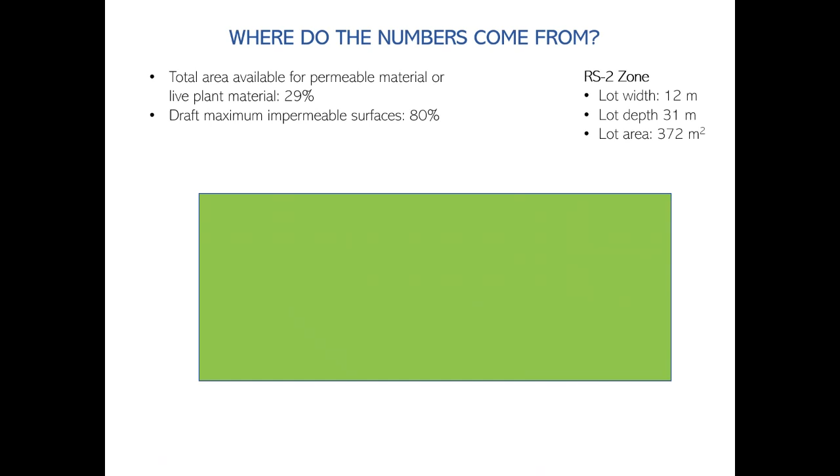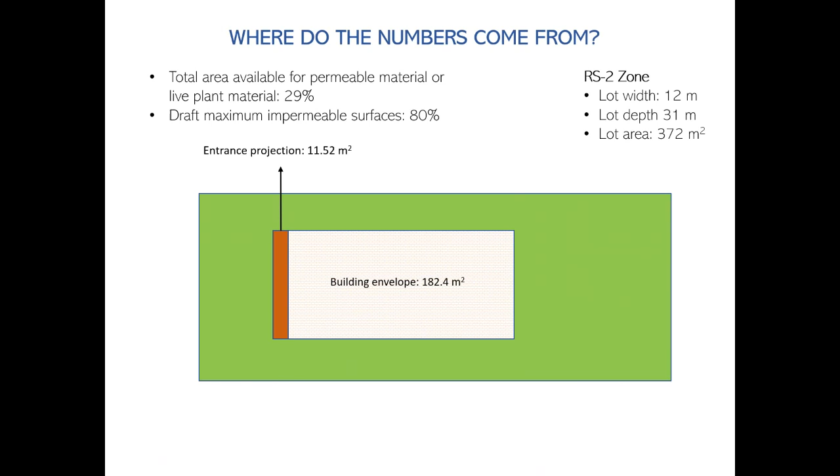This is another example showing a property in the RS2 zone with a lot area of 372 square meters. If you were to build out to maximize the setbacks in this zone, you would get a home of roughly 182.4 square meters. Then you could have a projection like an overhang at the front of the home. You could have a deck projecting from the rear of the home. You would definitely have a driveway and a front walkway, and an accessory building like a shed in the backyard.

Again, we have seen in the past that homes will cover a large proportion of their property with surfaces like concrete, leaving little space for the natural filtration of water into the ground. In this case, for the RS2 zone, there's roughly 29% of the property which could be open for landscaped areas. And this aligns with the draft standard, which would allow a maximum 80% of the property to be covered with impermeable surfaces, with the remaining 20% which must be permeable.

So as you can see with both of these examples, there's still some leeway to integrate other impermeable elements on the property that we may not have taken account for, so that the standards could be reasonably attained in new housing developments.

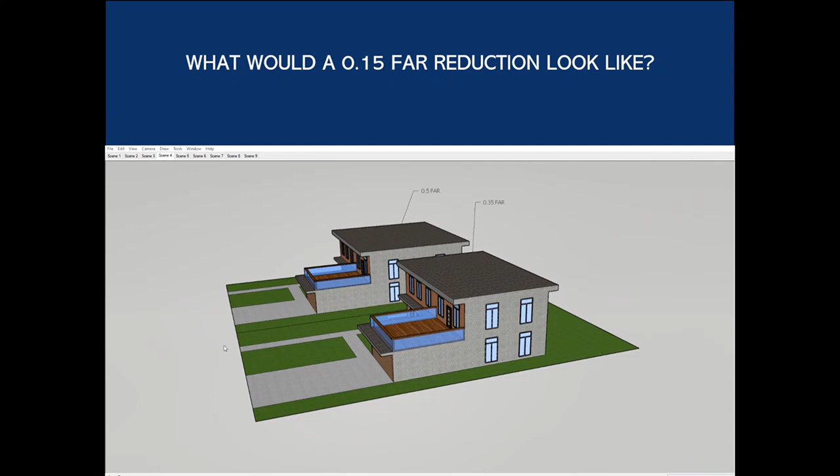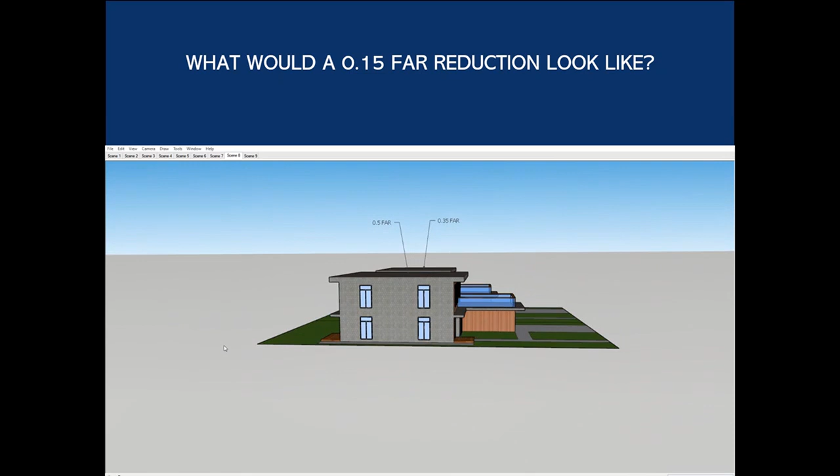As you can see, the proposed FAR reduction model represents a smaller building that looks more modest in scale compared to the existing FAR standards model. This scenario illustrates a reduced building depth, which may be more visually appealing for residents in neighboring properties. However, a reduced building width could also be incorporated with the same proposed FAR reduction, resulting in a slimmer building visible from the street. Now I will pass it along to Emma, who will continue with the next slide.

Something to consider if we were to reduce floor area in residential zones is the impact on the rental housing market. If floor area is reduced, homeowners may decide not to construct a secondary suite or a coach house due to reductions in living space.

A way to combat this is through density bonuses, an approach used in West Vancouver as well. For example, a 0.05 FAR bonus for up to 500 square feet could be provided for the construction of a registered secondary suite. Similarly, a 0.1 FAR bonus up to 800 square feet could be provided for homeowners who wish to construct a coach house.

Another potential approach that could be implemented to reduce the scale of homes in mature neighborhoods is the inclusion of portions of garages in floor area. Currently, the zoning bylaw excludes all of the garage from the calculation of floor area, even though the garage does add massing to the home. Including portions of the garage in FAR is an approach taken by other municipalities in Metro Vancouver, like New Westminster.

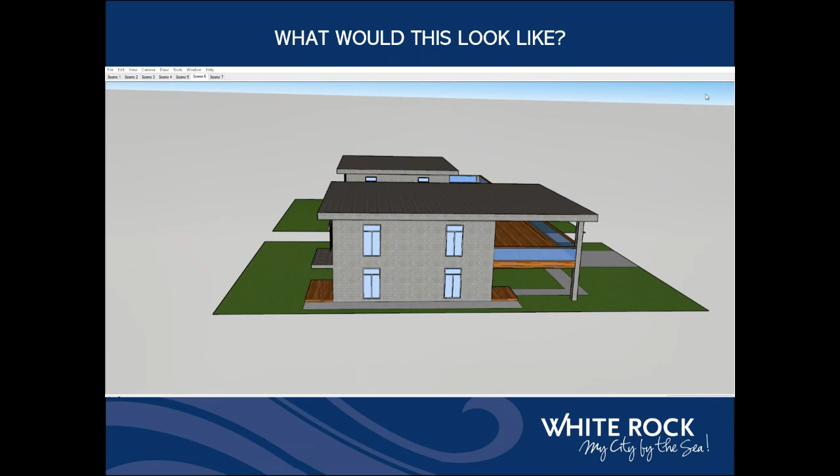In this alternative approach, the proposed changes would include any portion of a balcony which exceeds 10% of the residential gross floor area of the home in the total permissible square footage allowed on a lot. As you can see in the video, the covered balcony model adds quite a bit of massing to the building, which is why we thought this alternative approach would be a great way of addressing the scale of homes in single-family zones. Now I will pass it back to Emma, who will continue with the next slide.

Did you know that some cities in Metro Vancouver provide bonuses for FAR for energy step code compliance, similar to FAR bonuses for secondary suites and coach houses? Providing a bonus for the implementation of the various levels of the BC Energy Step Code would help to incentivize green building methods.

This would be particularly impactful for residential homes, as green building standards such as the Energy Step Code require thicker insulation, which further takes away from livable space in the home. By providing this small bonus for FAR, people are able to construct green homes without reductions to their living area.

So for example, in New Westminster, residents can get a 0.01 FAR bonus if the building meets Energy Step Code 3, a 0.03 FAR bonus if the building meets Energy Step Code 4, and a 0.05 FAR bonus if the building meets Energy Step Code 5 or Passive House Design.

The benefits to encouraging green building standards include improvements to energy efficiency and reduction in monthly costs, and a reduction in greenhouse gas emissions, which mitigates the impacts of climate change.

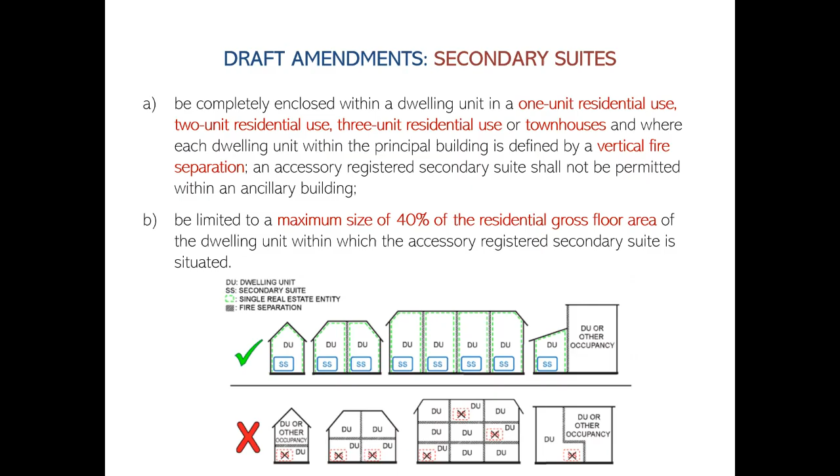So as I mentioned, the second key issue identified was around amenity space requirements. Currently, the zoning bylaw has no standards which require amenity spaces in multi-unit residential buildings like apartments and townhouses. Amenity spaces are recreational areas provided in multi-unit residential buildings like apartments and townhouses. These areas can either be indoors or outdoors, open to all residents of a building, or restricted to a specific unit for residents to use.

Amenities like communal swimming pools, meeting rooms, and dining rooms, which are indoors and outdoors and available to residents, are called common indoor amenity spaces. Outdoor common amenity spaces could include community gardens or recreational spaces like a swimming pool, which are open to anyone in the building and situated outside. Lastly, outdoor private amenity space could include landscaped areas, patios, or decks, which are reserved for the use of someone in a specific residential unit.

One of the key reasons staff incorporated these draft amendments is due to the onset of the COVID-19 pandemic again, and because of the value people place on access to nearby amenities. These draft amendments seek to improve the livability of new apartment developments by incorporating outdoor common and indoor common amenity areas to encourage social connection and a sense of community. Similarly, in townhouse developments, outdoor common amenities and private outdoor amenity areas ensure residents have private outdoor areas for children and families to use. Another key amendment proposed is the exclusion of indoor common amenity spaces from the calculation of gross floor area in secure rental tenure developments.

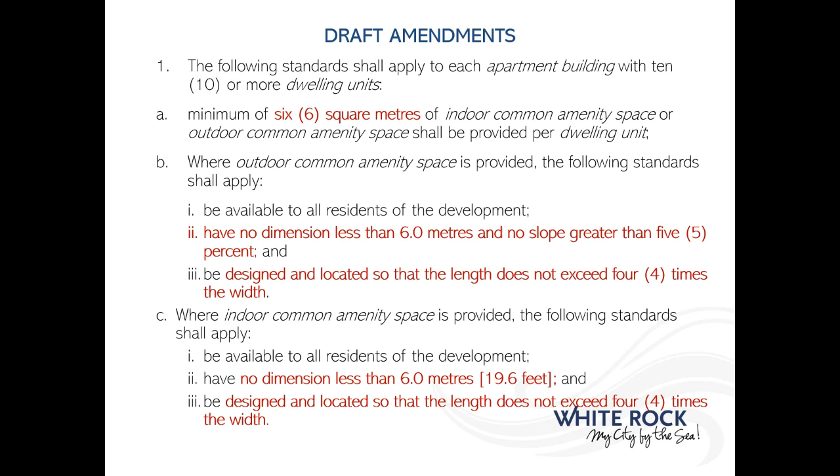So the draft amendments for this section would apply to apartment buildings with 10 or more dwelling units at a supply rate of 6 square meters per dwelling unit. As per points 1B and C on the slide, if outdoor common or indoor common amenity areas are provided, they must be available to all residents, have no dimension less than 6 meters, and be designed so that the length does not exceed 4 times the width. These design standards would ensure that the amenity space is functional and can reasonably accommodate recreational activities.

I'll now pass it on to Emma, who's going to discuss our next topic, which is landscaped open space.

Thanks, Neetu. Draft standards for landscaped open space can encourage many community benefits, such as the natural filtration of water through the ground, which reduces surface water pollution. This would be accomplished by requiring landscaping with permeable materials like live plant material. Other key reasons include tree retention, beautifying the streetscape, and encouraging the use of live plant material for the provision of wildlife.

We have a question I thought you could speak to. It asks, will the bylaw limits we're looking at right now as they relate to landscaped open space prescribe or set a total percentage or maximum percentage of impermeable surface? Yes, draft standards would have a maximum percentage of the lot which could be covered by impermeable materials. For example, in the RS1 zone, which we'll get into in a few slides, the maximum amount of impermeable materials would be, say, 70%, and the rest of the lot, 30%, would have to be permeable materials. That's something we're looking to integrate into all the different zones in White Rock.

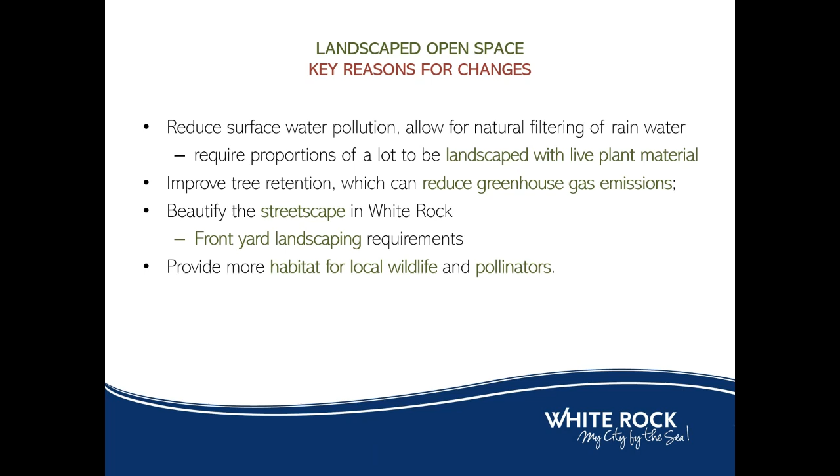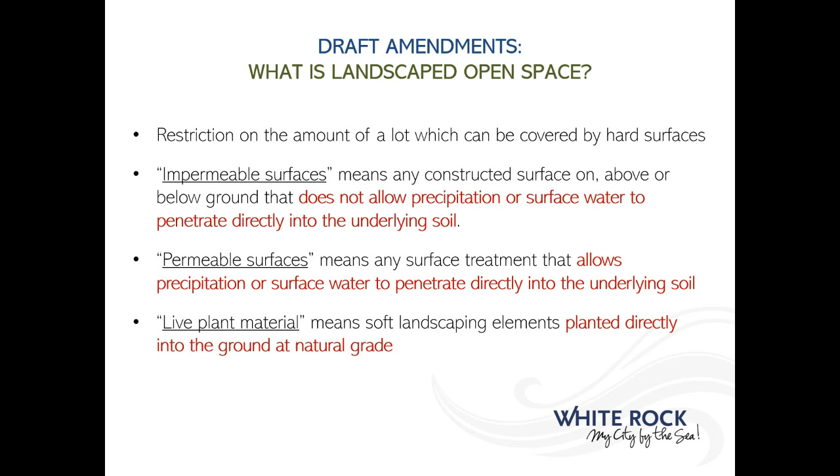So landscaped open space standards typically place a restriction on the amount of a lot which can be covered by hard surfaces like grouted stone or concrete. Impermeable means water cannot penetrate into the underlying soil, while permeable means that constructed surfaces and live plant material allow water to penetrate directly into the ground.

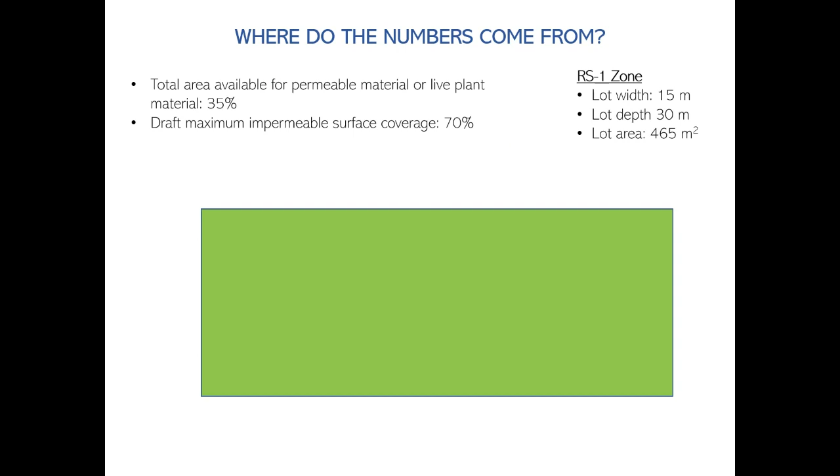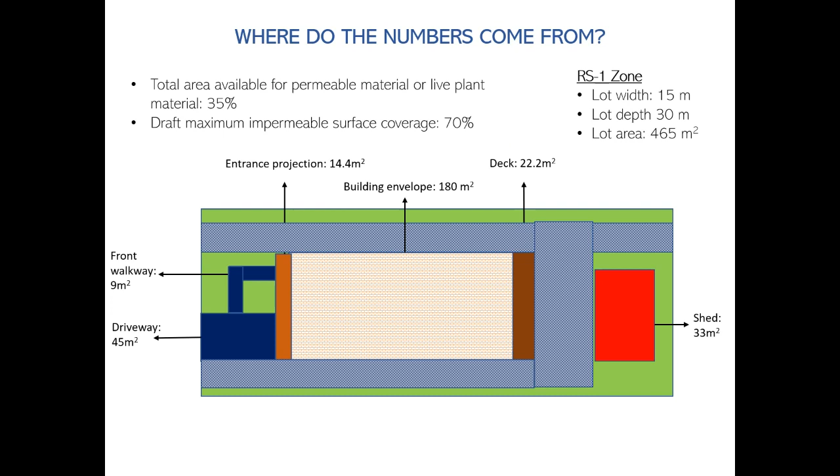We did scenario testing to ensure that people would be reasonably capable of attaining landscaped open space standards. We drew out all the impermeable surfaces on a lot to see how much space could be reasonably dedicated to open permeable surfaces. In this case, for the RS1 zone, there's roughly 35% of the property which could be open for landscape areas, and this aligns with the draft standard requiring a minimum of 30% of the lot covered with permeable material.

Similar to the previous slide, this shows a lot in the RS2 zone. Considering all the hard surfaces that could be integrated onto this lot, like a building, a shed, or your driveway, you would have roughly 29% of the lot open for landscape materials, which aligns with the draft standard requiring a minimum 20% of permeable surfaces. As you can see with both examples, there's still some leeway to integrate other impermeable elements on the property that we may not be accounting for, so the standards can be reasonably attained for new housing developments.

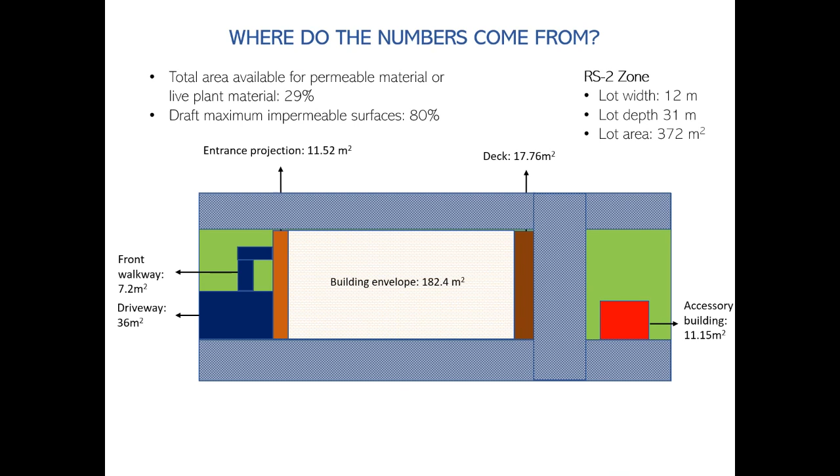This is an example of a model showing the impacts of the landscaped open space standards. Here we have an RS1 zone lot. In the video, the model represents proposed landscaping standards on the left, and the model on the right represents no landscaping standards, or the status quo.

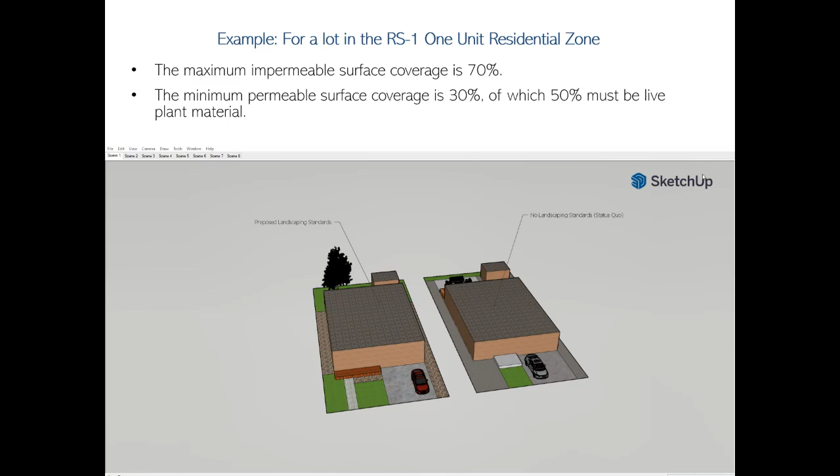Some key things to note are that the side yard area and the front walkway have incorporated river rock, which is an example of a permeable material for the proposed landscaping standard model. The no landscaping standards model has pavement in the side yard area and the front walkway, and a large grouted stone patio in the backyard. These are all non-permeable elements. A property owner could potentially pave over their entire lot with concrete or asphalt. With the new proposed standards, this would not be permitted on an RS1 zoned lot, and you would need a minimum 30% of the lot landscaped with permeable materials.

Now I'm going to discuss our next topic, which is the scale of housing in single-family home zones. Staff focused on this topic as part of Council's strategic priority to review single-family home areas.

Some of the key reasons as to why these reductions in the scale of residential housing are being explored include concerns over what residents call the monster home dilemma, whereby newer housing development does not suit community character, and this can be addressed by reducing floor area ratio, otherwise known as FAR. We will also be discussing density bonuses, which can be provided for energy efficient building design and for accessory dwelling units like secondary suites and coach houses to support the rental housing market.

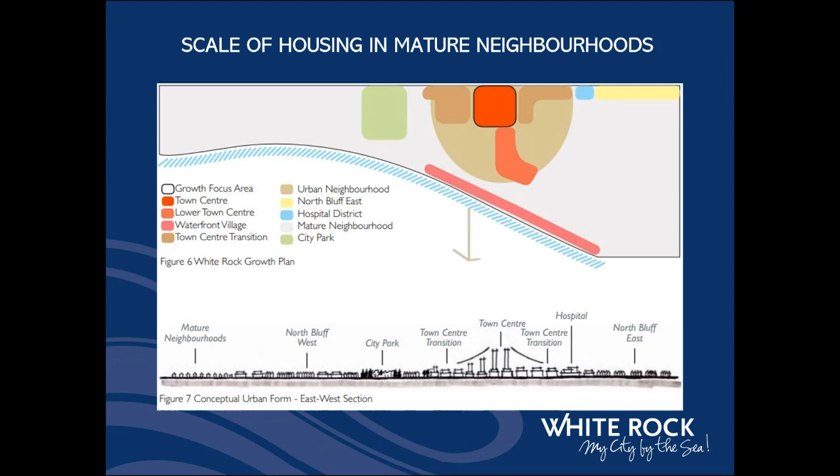The majority of areas in White Rock are known as mature neighborhood in the official community plan. These areas are characterized by low-scale residential development like single-family home zones, duplexes, and triplexes. When discussing draft amendments for single-family home zones, these are the areas we're referring to - the mature neighborhood area, marked as gray on the upper portion of the map.

Engagement sessions for the development of the 2017 official community plan indicated that many in the community felt that the character of new housing development doesn't suit existing development in the city of White Rock. One resident noted that we need to define the character of housing to be built, that there are too many monster homes. Another mentioned the loss of neighborhood character from monster houses, and that monster homes don't fit neighborhood character. This is a trend that we saw in engagement summary reports for the 2017 OCP engagement sessions.

An approach to reduce the scale of single-family homes is through reductions to FAR. FAR, or floor area ratio, is the ratio of a building's total floor area relative to the size of a lot. For example, if you have a 500 square meter lot and the FAR is 0.5, then you could build a 250 square meter home. Certain areas in the home, though, are not included in the calculation of FAR, such as basements, garages, carports, crawl spaces. So you could accommodate a home that is actually much larger than 250 square meters on a property of this size, if you accounted for all the space not included in the calculation of FAR.

The first alternative approach to addressing FAR is the scaled approach, used in West Vancouver for all of their single-family home zones. In this approach, if your lot is greater than 677 square meters, then the FAR could be 0.35. If the lot is mid-sized and between 474 and 677 square meters, then the total size of the home is set at 237 square meters or 2,551 square feet. And if the lot is smaller, less than 474 square meters, the FAR would remain at 0.5.

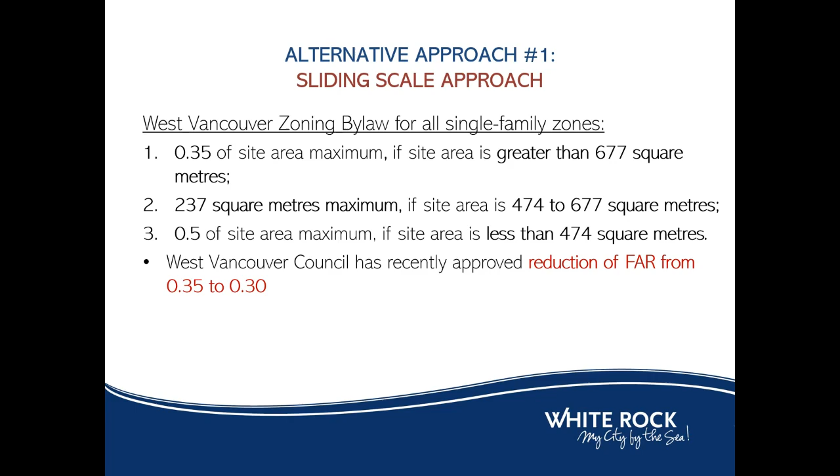This draft standard would be most impactful in the RS1 zone, which currently has an FAR of 0.5. The majority of lots in the RS1 zone are more than 677 square meters, as seen in this table. A total of 1,243 lots could have their FAR reduced from 0.5 to 0.35. Reducing the FAR in this RS1 zone from 0.5 to 0.35 would result in a home that is at least 30% smaller for lots larger than 677 square meters.

As you can see in the table near the bottom of the slide, the impacts of reducing FAR on a lot that is around 700 square meters, or 7,534 square feet, would result in a home that is 30% smaller - so 1,130 square feet smaller - if your FAR was reduced from 0.5 to 0.35.

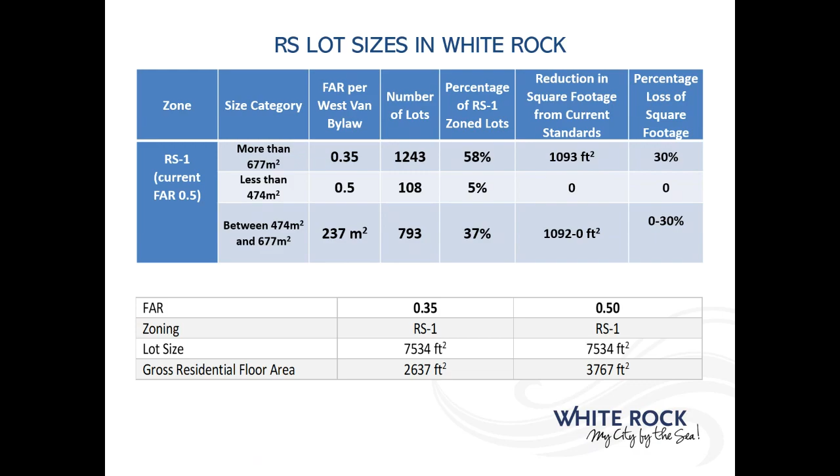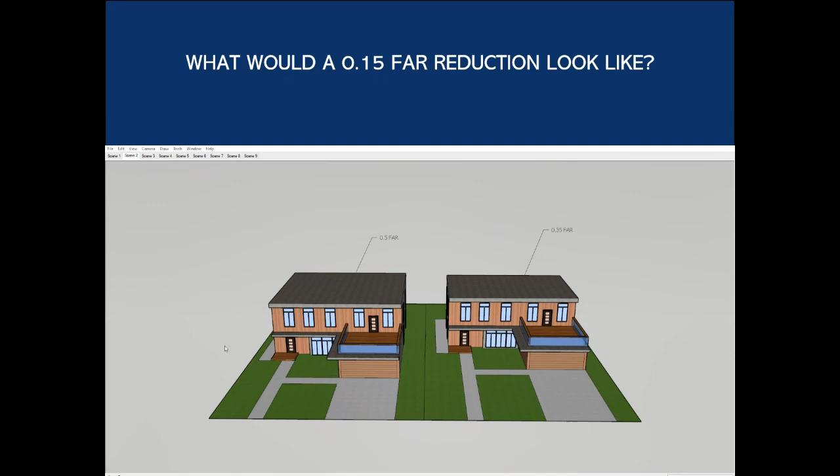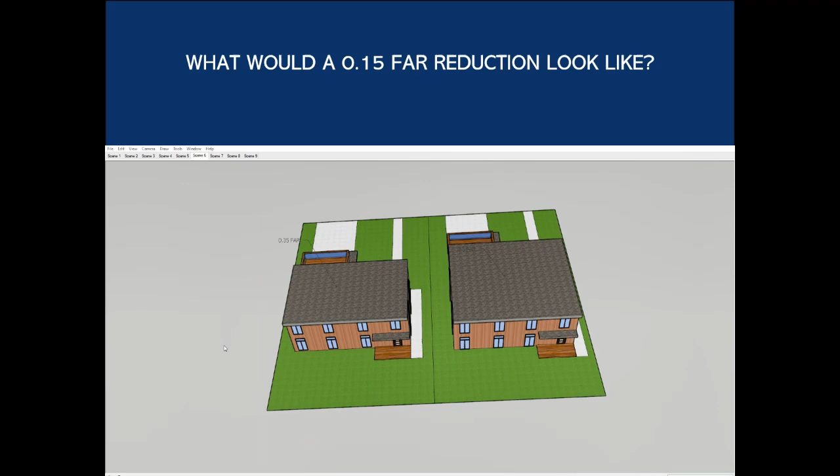This scenario was created based on the provisions of an RS1 zone, and both models consist of a lot size of 677 square meters. The models also take into consideration zoning provisions like minimum setback requirements, max floor area, and maximum lot coverage. The model on the left has an FAR of 0.5, and the model on the right has an FAR of 0.35. The proposed FAR reduction model at 0.35 represents a smaller building, which looks more modest in scale compared to the existing FAR model with 0.5 FAR.

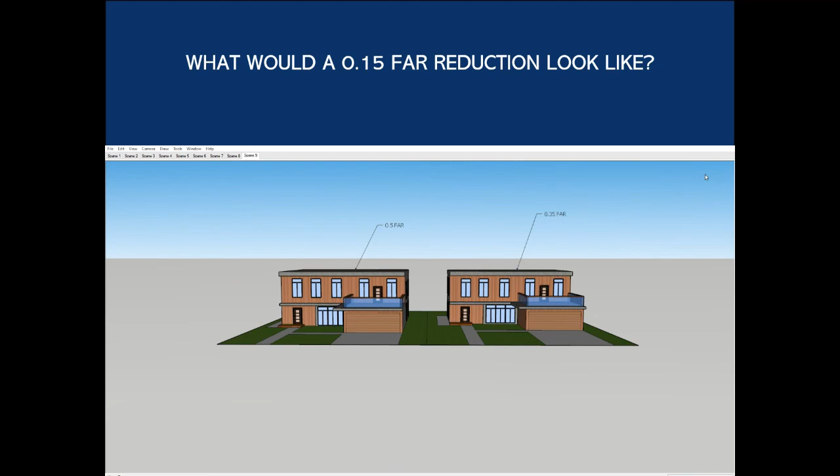This scenario illustrates a reduced building depth, which may be more visually appealing for neighboring properties, but you could also reduce building width, which could be incorporated for the 0.35 FAR model to have a slimmer looking building from the street.

Something else to consider if we were to reduce floor area in residential homes is the impact on the rental housing market. FAR bonuses could be provided for secondary suites and coach houses to reduce these impacts. For example, a 0.05 FAR bonus for up to 500 square feet could be provided for a registered secondary suite, and a 0.1 FAR bonus up to 800 square feet could be provided for homeowners who wish to construct a coach house.

The image on the slide here depicts the impacts of a 500 square foot bonus for a secondary suite. The orange area below the back deck shows the space that would be provided for the registered secondary suite as a bonus.

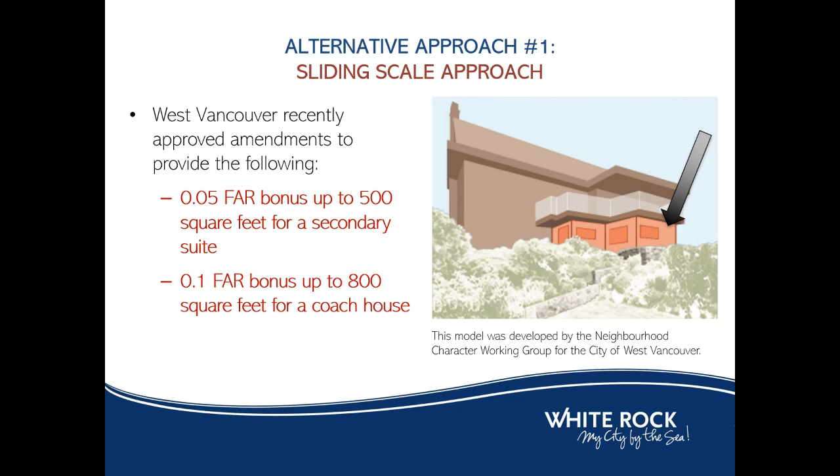Floor area calculations currently also don't include portions of a garage, balcony, covered deck, or porch. Draft amendments propose to include portions of floor area in the garage above 450 square feet in the calculation of FAR, which is roughly the space needed to accommodate a 2-car garage. So garages larger than that would be included in your FAR calculation.

We've also received complaints from people who have noticed that unenclosed balconies are being enclosed illegally after building permits have been issued to add floor area to their homes. This could be addressed by automatically including any covered deck, balcony, or porch which exceeds 10% the size of the home in the calculation of FAR. This is an approach taken by numerous other municipalities in Metro Vancouver.

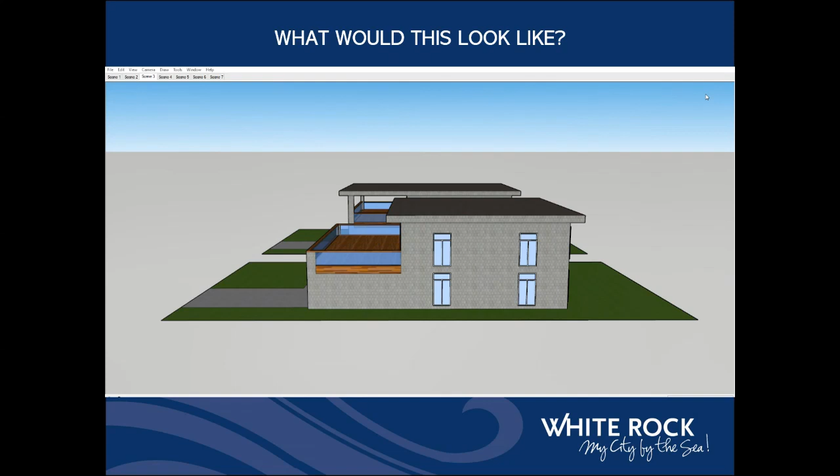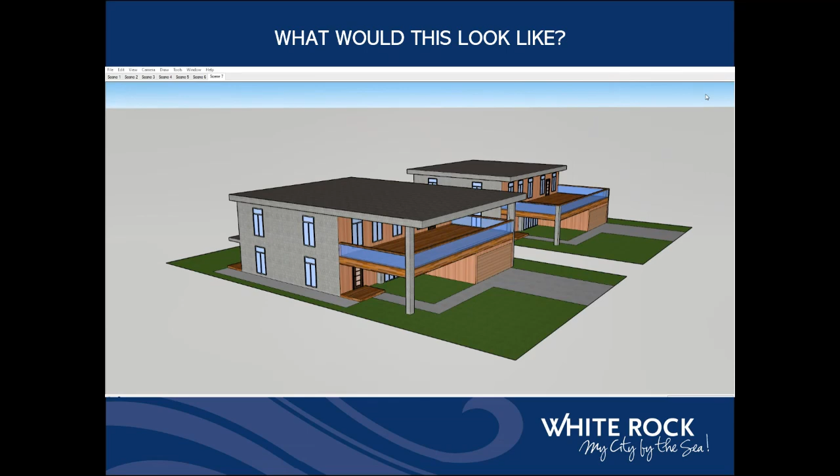This is another model showing the impact that covered balconies and decks can add to a building's massing. On the left, this model shows a house with a covered deck, while the other model shows the impact of not having the deck covered, with the roof extended over top. Including portions of a covered deck in the calculation of FAR could really reduce the massing of the building, and including any portions of the deck beyond that size could enhance the streetscape and reduce the size of homes.

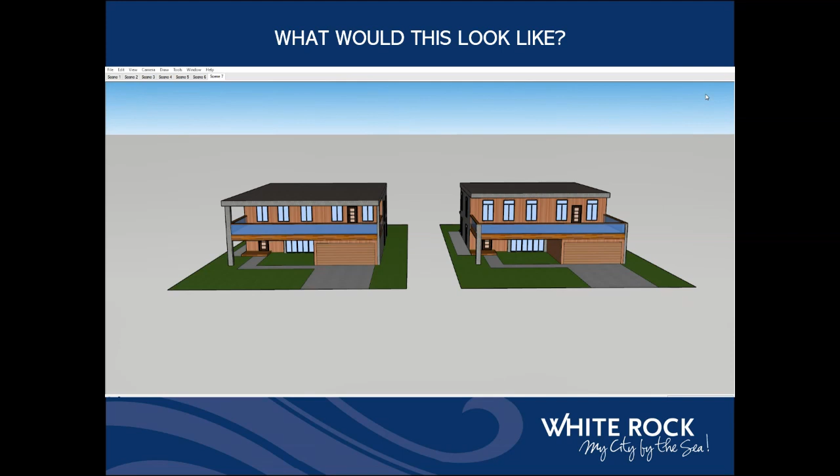Similar to FAR bonuses for accessory dwelling units like secondary suites, we could also provide bonuses for implementation of the various levels of the BC Energy Step Code, which would incentivize green building. This would be particularly impactful for residential homes, as green building standards have multiple benefits like reducing monthly energy costs, reducing greenhouse gas emissions, and improving energy efficiency. Usually implementing green building methods involves thicker insulation and reduces the livable space in a home, so including a FAR bonus for implementing the Energy Step Code could account for this and incentivize its use in White Rock.

For example, in New Westminster, residents can get a 0.01 FAR bonus to meet Energy Step Code 3, a 0.03 FAR bonus to meet Energy Step Code 4, and a 0.05 FAR bonus if they meet Energy Step Code 5.

Further to the topics discussed today, other topics included in the bylaw review include electric vehicle charging, building height in the waterfront village area, multi-unit residential parking, off-street loading, and short-term bicycle parking.

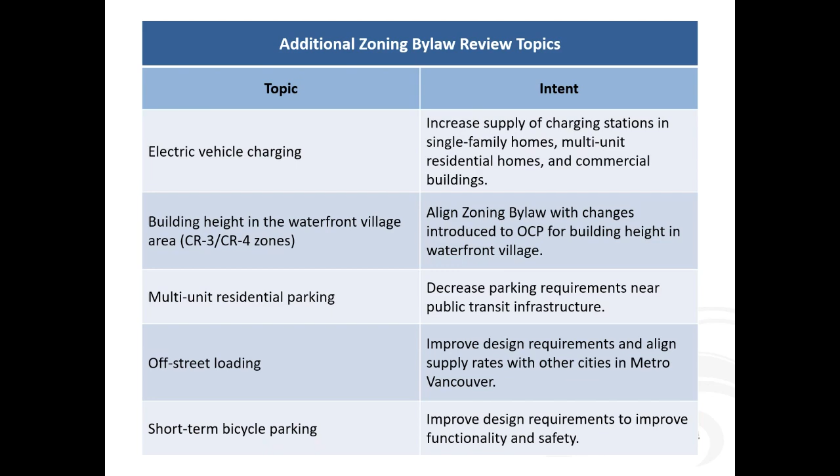I'm just going to publish a few of the comments that aren't really asking a question, but I want to make sure we acknowledge them. There's a comment: I find it difficult to understand why zonings have been knocked down in the OCP when we are and will continue to be in a housing crunch. These changes seem to be political. We live in White Rock, why not plan for the future? The future is more people, we need more housing, not less. Thanks for the comment.

There's a comment here about zoning should be looking at applying itself to the regulation of electrical and telecom TV lines, putting them underground. We do have a bylaw that requires the undergrounding of what would otherwise be overhead wires. Again, it's about finding the best legal tool to regulate certain activities, and we do have a separate bylaw that allows us to require that through new development, hydro lines are put underground.

There's concern about amenity areas that with COVID have been closed and not accessible, and so they add costs to maintain and can become outdated over time. So the preference would be no amenities, lower priced units and smaller units, and encouraging people to get out and spend their amenity time outdoors and socializing. So thanks for the comment.